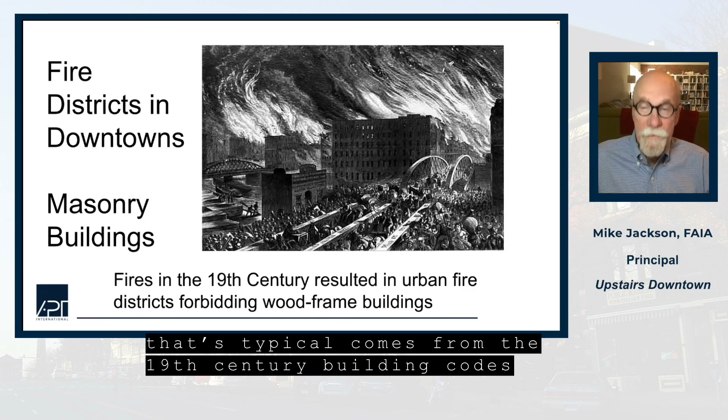It should come as no surprise to you, but basically our whole areas of main streets and downtown commercial centers evolved because of building codes. In the middle of the 19th century, the concern over fires destroying city centers basically caused most communities to early on adopt a fire district in their downtown or central city, which required all buildings to be masonry construction. So our whole basis of Main Street and the look of this character defining feature that's typical to us comes from the 19th century building codes and fire safety.

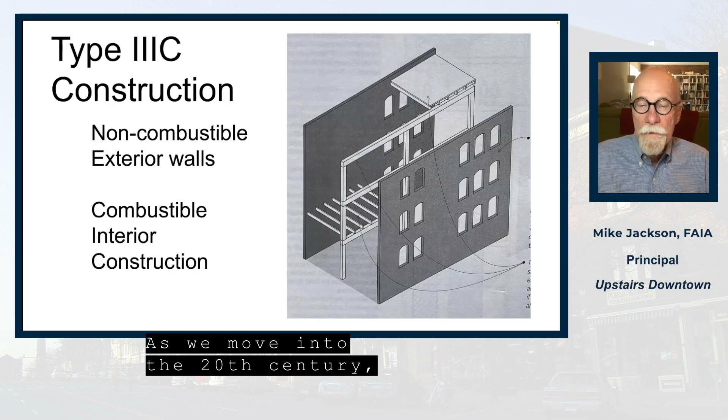Out of this came a modern technical definition of the Type 3C construction, which basically are those brick and stone exterior bearing walls that have a high fire resistance rating, but an interior structure that could be wood framed or combustible. Most of the 19th century buildings are like this. As we move into the 20th century, Main Street evolves into more complicated and more diverse structural systems with steel, iron, and various concrete systems.

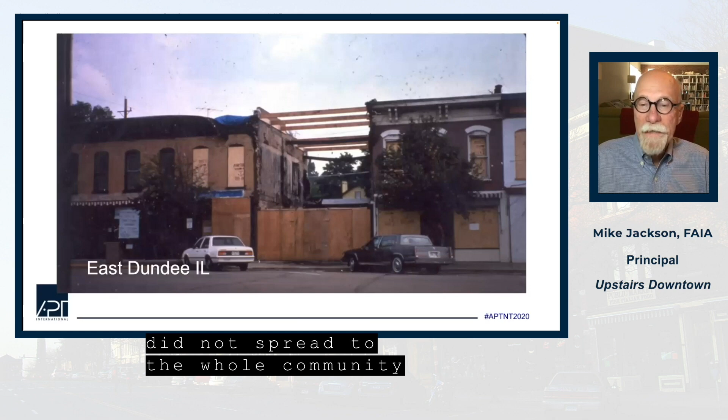So the bread and butter of many of our older main streets is this type of construction. So it's a focus of our effort on codes. And it largely worked with the appropriate fire protection systems. A fire in a single building hopefully did not spread to the whole community because of this idea of these non-combustible masonry bearing walls separating structures.

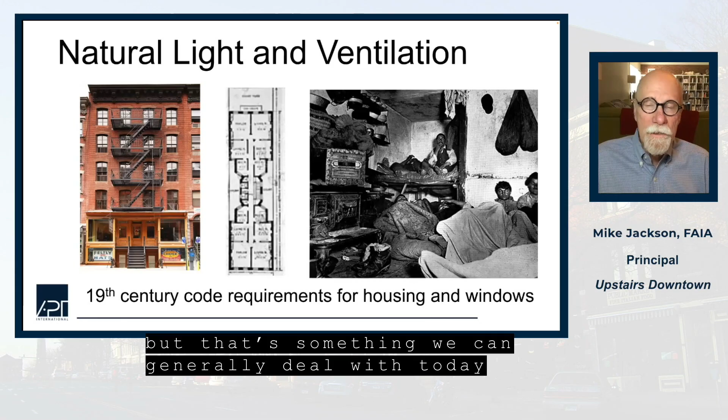But basically, early concerns about natural light drove the idea of how big a building could be. And one of the problems we sometimes have is long, skinny Main Street buildings and light and air, but that's something we can generally deal with today with modern systems.

So what would I say is a typical Main Street building that defines the universe that we're looking at? It's a 2 or 3 story masonry bearing wall structure on a 0 lot line, face to face with masonry party walls. And this has shaped downtowns across the US, beginning in the 19th century particularly, and throughout most of the 20th century. And the platting of Main Street was often done on a lot size of 20 to 25 feet, which becomes one of the modules for the Main Street look of the buildings that we're all concerned about in our program.

In the 20th century, we have changes in structure, but a lot more changes in material. The first floor structure is often just masonry with steel lintels across that. Architectural terracotta comes into play. And then as we move into the mid 20th century and the Art Deco era, we see more playful use of details, but again, more use of non-combustible materials, steel windows, steel structural systems. So Main Streets vary considerably into the 20th century from their 19th century formats, but you still see this street wall of punctured openings, street-oriented architecture.

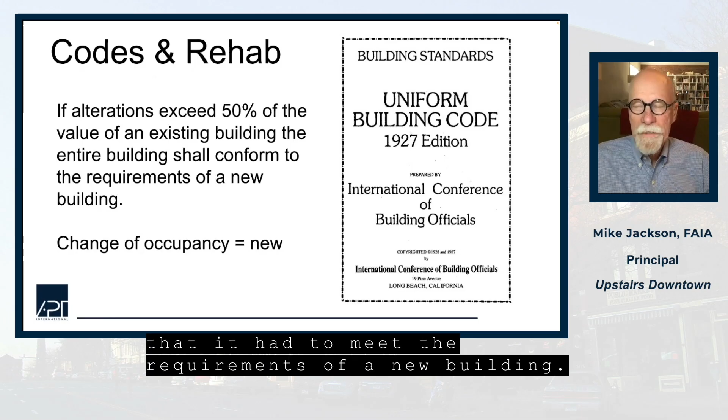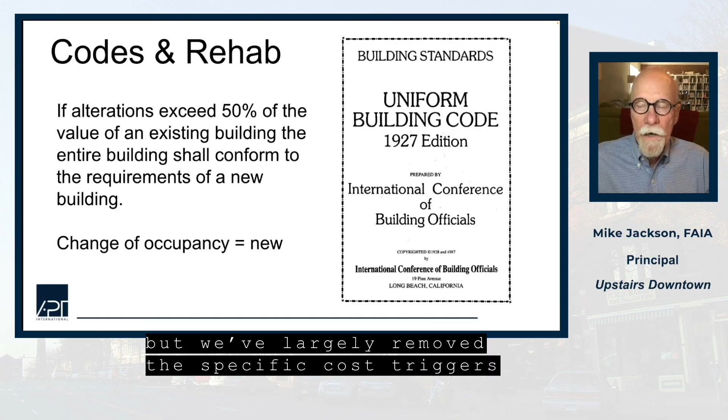This idea of a cost-based formula for older, low-value buildings has become a barrier, because if you are in a smaller community where the downtown buildings are worth a fairly small amount, percentage-wise, and you go to rehab it today, you would easily exceed that 50% and trigger this new construction. This bias towards this idea still exists in the code, but we've largely removed the specific cost triggers from the new codes.

The IEBC, with the work area method, really responded and said we should have a more proportional method of assigning owner-decided things they want to do versus what the code requires based upon the level of work you're doing. So at the repair level, you pretty much are just working with what you've got. There's not a lot of other things that are triggered, but the work area method, in my opinion, when you get to change of occupancy, is really working kind of like the older, earlier codes, where there's an assumption that everything's going to be brought up to some new level, which has historically been a problem with historic and older buildings.

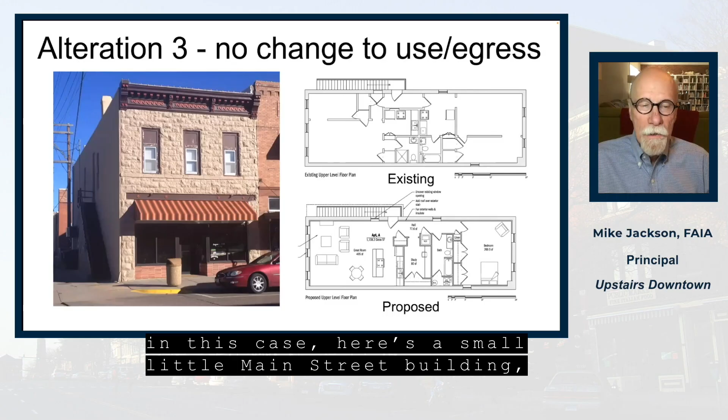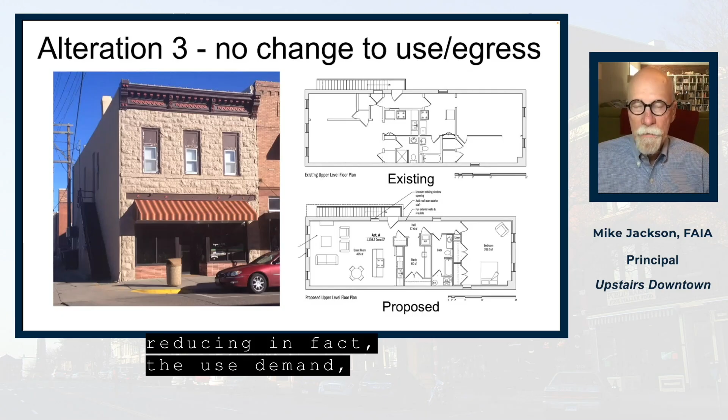Now, there can be extensive renovation of an existing building, but if there's no change of use, in this case, here's a small little Main Street building, one means of egress and a fixed outside metal staircase. Previously, there were two little studio apartments. This was a gut rehab to put one proposed single bedroom unit up there. So no change of use, residential to residential, from a 2-unit to a 1-unit, in fact reducing the use demand.

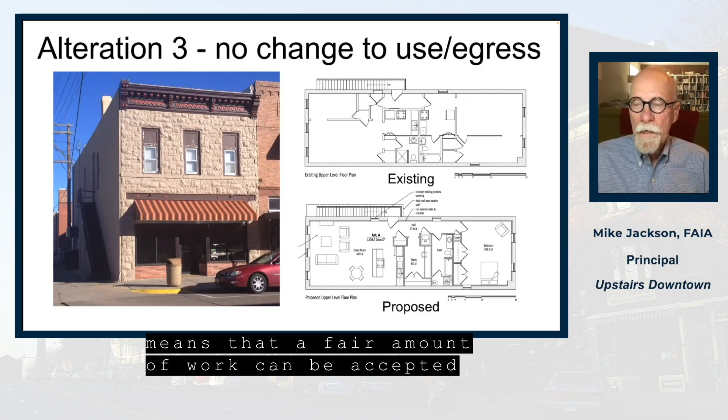And this kind of work could be done without necessarily triggering a licensed design professional, because it's no change of use, no change of egress. It may be a high level of alteration, but the change of use and change of occupancy is the higher trigger than just the amount of work. But again, this varies with local interpretations, but I'm trying to present this as an example. There could be extensive work on the inside of a unit, but no change to the egress path means a fair amount of work can be accepted without necessarily getting a special code interpretation on the change of occupancy.

Now, one of the things that we've discovered in reading the details about historic buildings in the various code compliance methods is this kind of provision. The code says, and this is from the prescriptive method, provisions of the code requiring improvements relative to a building's existing condition, relative to its pre-damage condition, that's referring to fire damaged buildings, etc., shall not be mandatory for historic buildings unless specifically required by this section. So there's interesting language here that says there's some things that are not mandatory for historic buildings.

But then the next section talks about life safety hazards. And then it says the provisions of this code shall apply to historic buildings judged by the code official to constitute a distinct life safety hazard. We're going to dig into this term. In chapter 12, which covers historic buildings, it has a similar clause where basically it refers to distinct fire hazards as defined herein, and says that if you have a distinct fire hazard, you should install an approved fire extinguishing system. And then it allows an exception where the code official can approve alternatives.

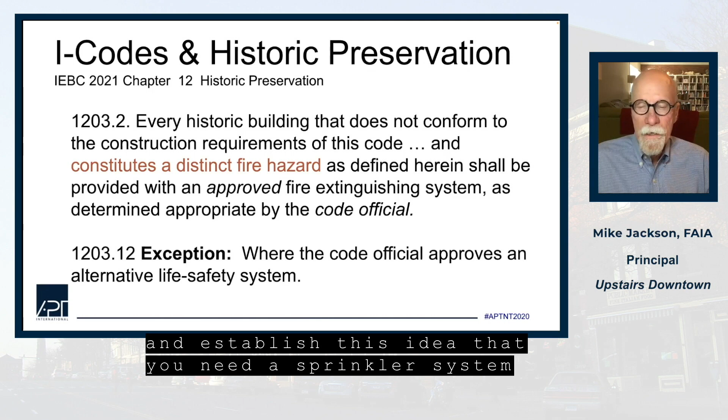This, again, distinct fire hazard versus distinct safety hazard is only in the language affecting historic buildings. So because it's kind of a high trigger and establishes this idea that you need a sprinkler system and a fire extinguishing system, let's look at this term. The code actually doesn't define a distinct fire hazard or distinct safety hazard. We proposed a definition that we took from the California Historical Building Code that says any clear and evident condition that exists as an immediate danger to the safety of occupants of the building or the adjacent public right-of-way.

And the conditions here that are really operational concerns in the fire code are not necessarily a distinct hazard. The fire code might talk about a blocked exit, while removing the blockage from the exit is an operational thing. The fire code might talk about storing combustible paint materials in a stairwell. That would be an operational issue. So operational issues are covered by the fire code. The building code really looks at what is something that's permanent with the structure that needs to be repaired or is missing. I would generally argue that most of the things that I see as distinct hazards are often missing things. So let's look at this one, life safety.

In the code for historic buildings, stairway railings, it says grand staircases shall be acceptable without complying with handrail and guard requirements.

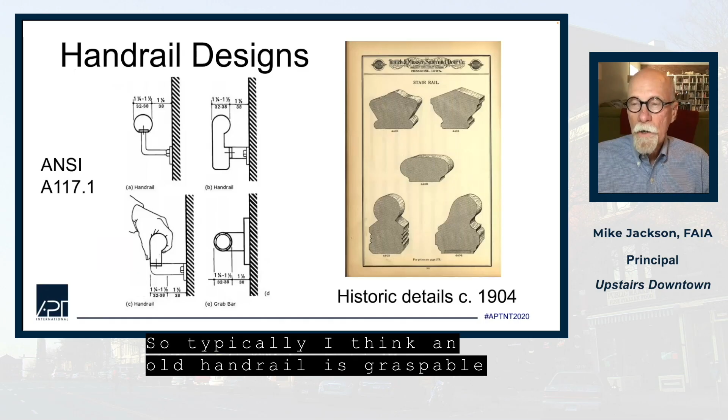And we know that historically, most old staircases had a wider handrail, but they're still made with curves and shapes that make them graspable. So typically, I think an old handrail is graspable and it may not have continuity, but I don't think that rises to the level of a distinct hazard. Only if you had a very large, like 12-inch wide sort of modern or larger stone profile at the top of your railing might it be non-graspable and you would need something. So a couple of ideas on distinct hazard regarding stairs and handrails.

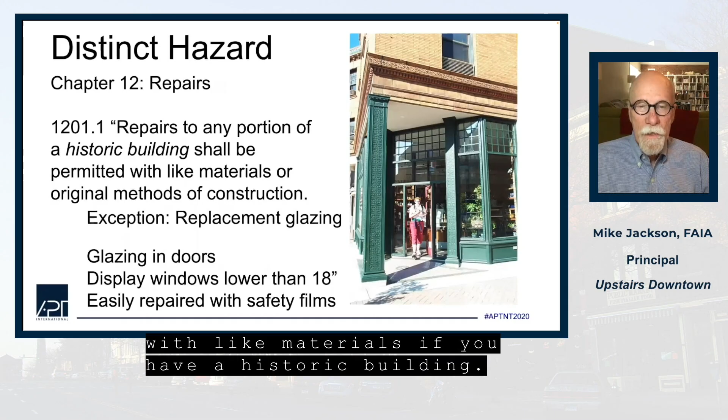The building code allows repairs to be made with like materials if you have an historic building. So if it's historic, like materials are permitted with the exception of hazardous materials such as asbestos and lead paint and glazing. For store owners, I think this is a particular issue. If you have a glass door or you have a display window with a bulkhead that's lower than 18 inches, the code says this is deficient today. I would say this is a safety hazard that's distinct, but the good side of this safety hazard is this is easily repaired with a modern safety film.

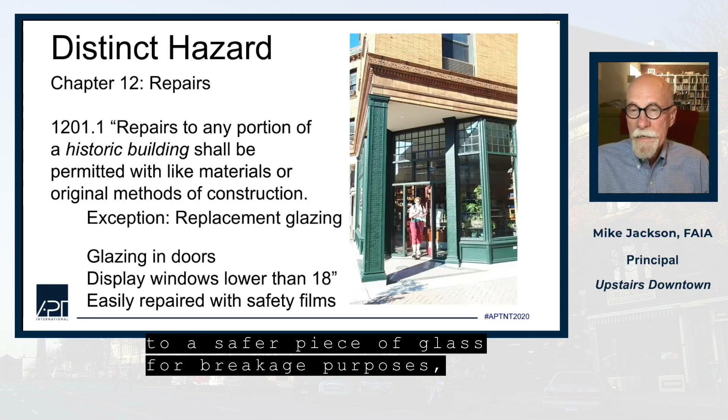So basically you can convert a piece of plate glass to a safer piece of glass for breakage purposes with the addition of the film. And it's a clear film that goes on one side of the glass, doesn't affect your maintenance. And so we can remove a distinct hazard through a modern additive technology. And you don't have to do a sprinkler system to address this distinct hazard. So here's a distinct hazard on Main Street.

On the upper floors of our downtown buildings, we often had corridors with glass transoms. And this was an idea of letting natural light in. Largely not needed anymore because of the artificial lighting that we can do today, which is so much more efficient. If you add a sprinkler system to a downtown building, it says you can leave your transom by putting a sprinkler head on both sides.

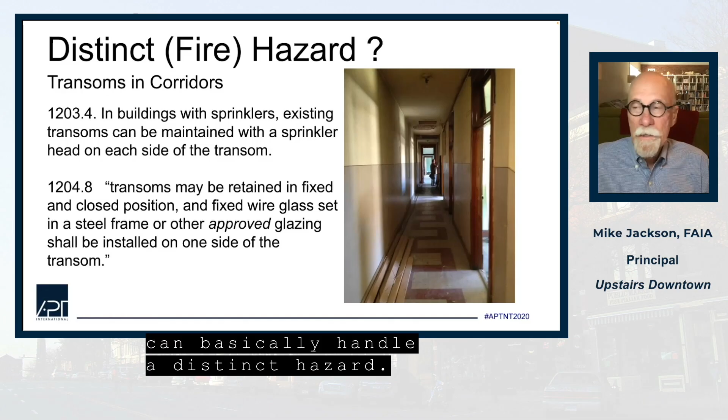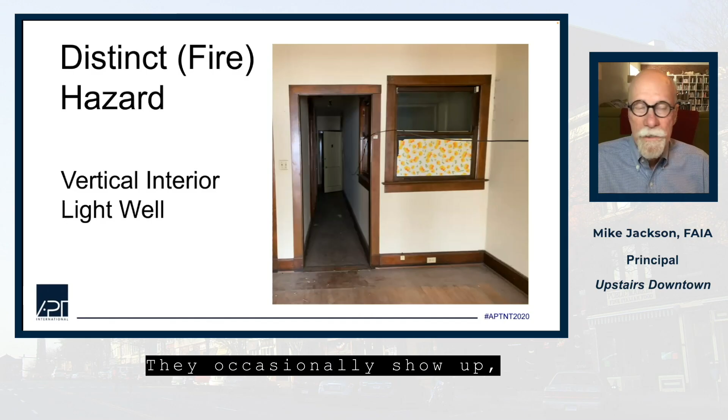So these are not common anymore. They occasionally show up. But these interior light courts would be, to me, an example of something that was a traditional material or design feature in an older building that could be considered to be a distinct life safety or fire hazard.

More often, the challenge that comes up that we see on codes that I want to kind of dig into, and you're going to hear more about in our workshop, is the change of occupancy, particularly putting more housing. If you put housing upstairs in a vacant space, prior use comes into consideration, but this creates issues of egress, fire separation, what level of fire protection besides fire separation, the sprinkler or not, and then cost, design, and issues related to that.

First issue for you is the number of exits you need. Basically you start with the IEBC and you end in tables in the building code. Only small-scale 2-story buildings are allowed to have a single egress from the second floor for residential occupancy, and in this case, a maximum of 4 units, with a travel distance of 125 feet. So this puts us in that small-scale building that I showed an example of earlier. So only the smallest buildings.

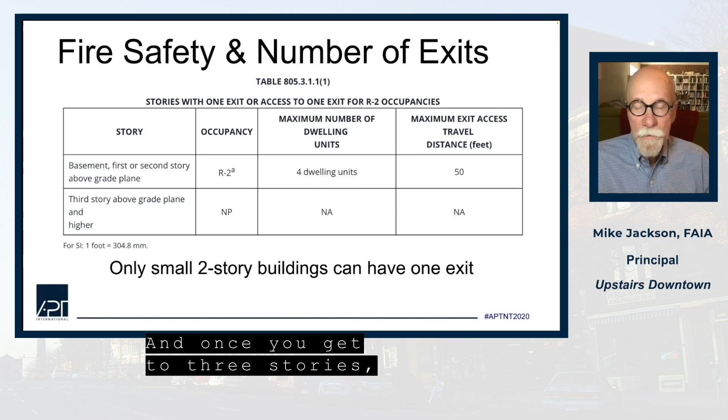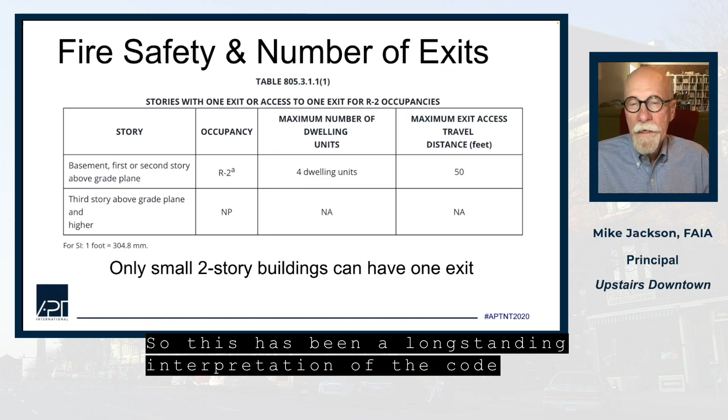And once you get to 3 stories, you're into requirements for 2 exits. And that can be front and back or side by side, depending upon how large your building is. So this has been a long-standing interpretation of the code. And further, here's that example of that small-scale building I mentioned on Main Street.

The IEBC specifically has this exception: for buildings less than 3,000 square feet total, existing conditions are permitted to remain at all stairways and guards. So this basically grandfathers in the existing stairs, railings, and guards on all small-scale buildings on Main Street. But I would still point out there could be some need for better gripping on handrails and guardrails, depending upon these dimensional exceptions I've talked about.

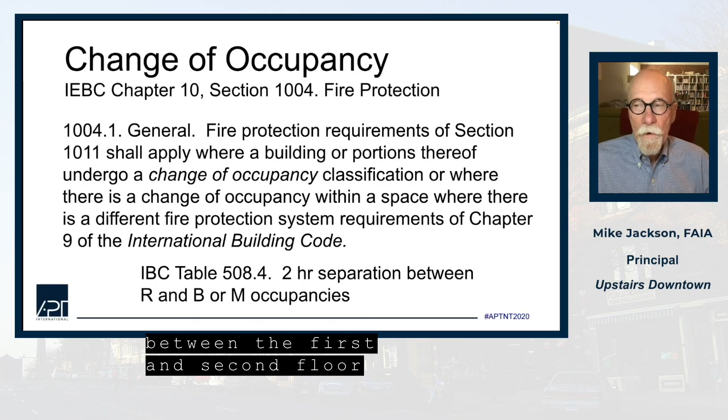The code is very clear about the issue of fire protection and separation. This is the topic related to enclosures and safety from having barriers and fire-rated systems. Fire protection is required by Chapter 10 of the IEBC. And if you look at all the references, it ultimately gets you to a chapter in the International Building Code, which says you need a 2-hour separation between an R use on the second floor and a business or mercantile use on the first floor. So this 2-hour fire separation becomes a very real design issue in terms of rehab.

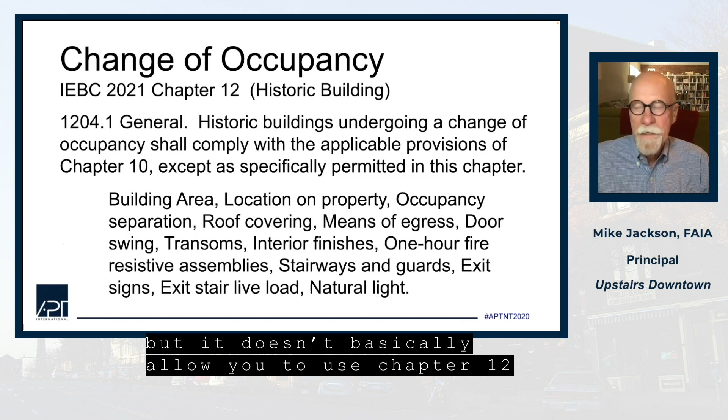Chapter 12 on historic buildings has its own little section on change of occupancy, but it pretty much gets you back to the other code provisions. It doesn't give you many details, and we're going to have more details in this conference on change of occupancy in IEBC Chapter 12, but it basically doesn't allow you to use Chapter 12 to eliminate the 2-hour rating requirement.

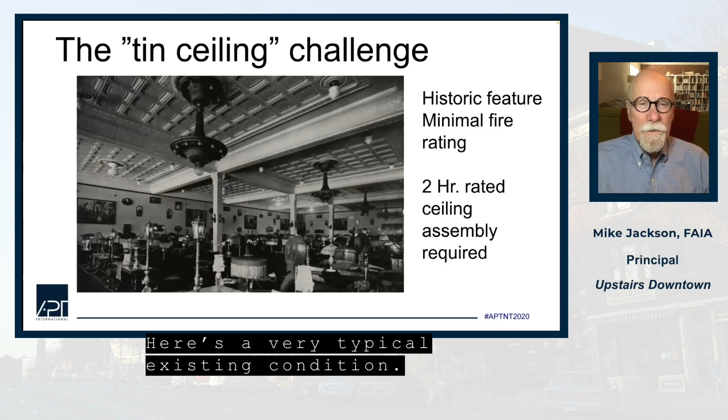Why is this such an issue? We know that there are lots of downtown and older Main Street buildings that had a tin ceiling on the first floor. A tin ceiling is a wonderful historic character-defining feature that actually has a fairly minimal fire protection rating. So if you converted a building and needed to get a 2-hour rating, what are you going to do? Here's a very typical existing condition. How do we get to 2 hours?

Well, if you put a sprinkler system in, you generally have met that requirement, and you're not going to have to change that separation rating. And I want to make a very important point here in terms of meeting the design standards for preservation. It's largely been accepted that exposed sprinkler piping on the first floors of our commercial buildings, even with an exposed tin ceiling like this, generally is not considered to threaten, destroy, or alter the historic character.

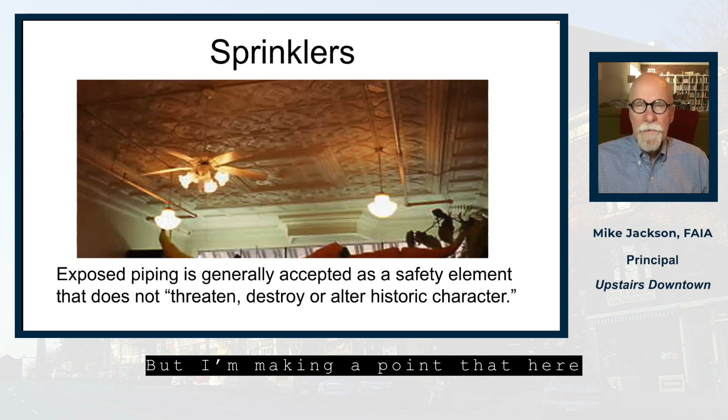The sprinkler piping has minimal dimensions, and it could be on the ceiling held away like this, or on the side walls, depending upon your dimensions. My point is that the sprinklers in and of themselves are probably not going to damage the historic character. So it's better to work with them exposed rather than trying to rip everything out and bury them. If you're furring out walls, you might be able to bury them, but in this case, we generally accept having them exposed as an appropriate historic preservation treatment. But that can be expensive compared to other options.

And I've got 3 different scenarios here of what you could do. Removing and reinstalling a tin ceiling with a new drywall is technically doable, and it is virtually impossible to do it really well. The old tin ceilings do not remove nicely and stay straight and crisp. They bend, they buckle. So this is an extremely high level of difficulty.

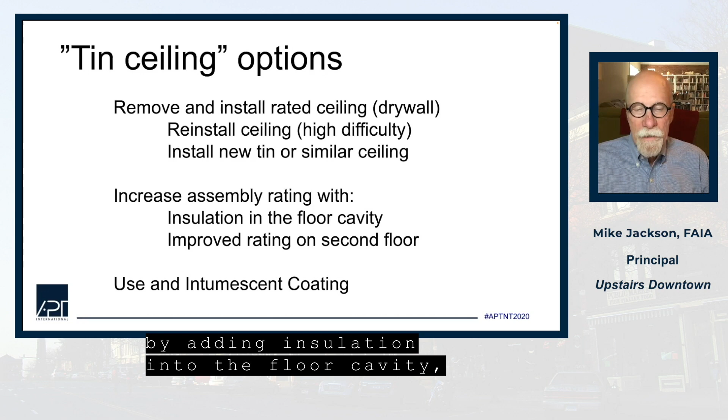It would conceivably be possible to remove a ceiling and put a new ceiling that would be similar in design, that would be less expensive than removing the existing one, but then you've lost the original material as well. You can also, though, increase the fire rating of the assembly by adding insulation into the floor cavity, or even improving the rating of the second floor. But again, depending upon how much you're putting on the second floor, that could change your doors and door thresholds and other issues on the second floor.

So it has issues. And lastly, you're going to hear in our program a session on the use of intumescent coatings, which is a new kind of technology that goes on like paint and can definitely increase the fire performance rating, because this intumescent paint swells up in a fire and improves the fire rating of tin ceilings and other materials. So these are 3 examples of preservation-based approaches that can basically address the 2-hour rating.

And then there's always the issue of what if you go through this and you get an hour and 45-minute rating instead of a 2-hour rating. There's where the authority having jurisdiction can say, listen, if you got that close, we'll accept that given other conditions. And we're also going to dig into the code options on that as well.

Now, lastly, I want to move from the discussion about what's in the existing code that are some of the major issues for us to what you can do about it. And what we discovered is that states and cities across the US are amending the code. Only a few states maintain a specific state historic building code. California has the state historical building code, and Ohio uses its own code as well that basically works with the older performance measures from the BOCA building code from the 1980s. So Ohio is also kind of working on its own on this and has been very successful with their historic buildings.

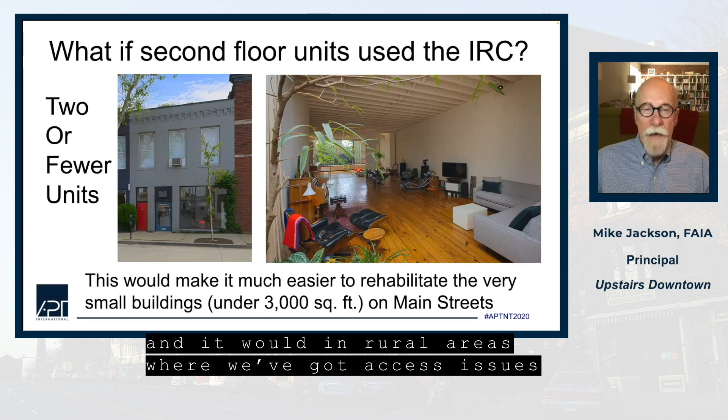But I'd like to propose another challenge. What if 2 or fewer units on the second floor could be done for buildings under 3,000 square feet using the International Residential Code? This would be a simpler version of this, and in rural areas where we've got access issues to architects and design professionals, this may be an easier way to allow the conversion.

Now, this example I'm showing here was done in 1960, and it was done by an architect. It's an early loft conversion, but this idea that maybe there is a place for amending the code to allow the IRC to be used on the second floor of 2-story small-scale buildings may be a way, from an affordability standpoint and reducing the barrier of access to professionals, to encourage the rehabilitation of upper floors. This is an idea I think is going to be worth exploring as we look at amending the code in the future.

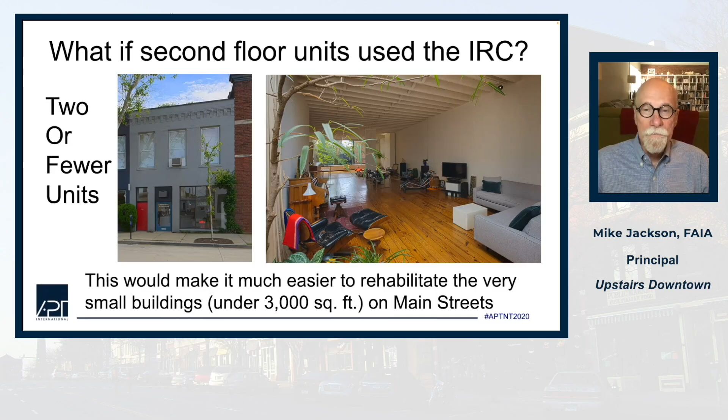Now, another long-held issue within the building code world has been that of single exit buildings. There's been some work on this in Pittsburgh and New York City, which has a lot of smaller scale 5-story buildings. But Charlottesville, Virginia recently changed their building code to allow new 5-story buildings with full sprinkler systems to be built with a single exit system.

And this is related to a lot of construction details for the fire protection of the single exit and the format. Research on this has come out of the West Coast, out of Seattle, and out of Europe, because many European centers like Paris have single exit buildings, and they use other fire protection systems that have worked quite well. So this challenge to the idea of a single exit staircase when you sprinkler would help offset. If we have a higher threshold of cost to add a sprinkler, maybe one of the benefits of that is reduced exit requirements.

Now, the current code says this about single exit buildings with sprinklers: an automatic fire extinguishing system or sprinkler shall not be used to substitute for or act as an alternative to the required number of exits. So basically, when you sprinkler a building, we now give you longer travel distances, but we don't allow you to reduce your number of exits.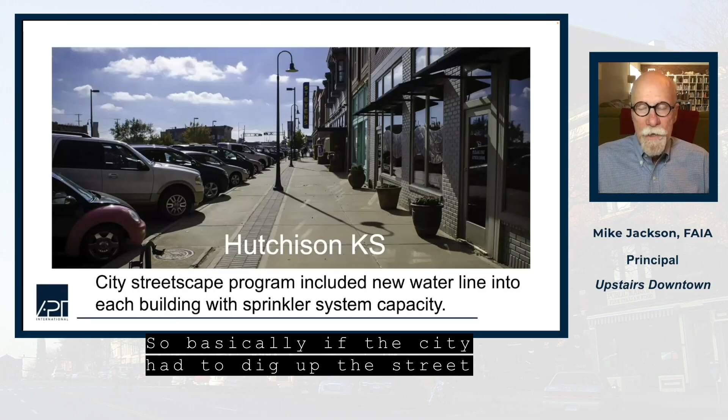Moving to the topic of incentives, Hutchinson, Kansas recently replaced their sidewalks. And when they did so, they put a sprinkler-capacity water line into every building on Main Street. So basically, if the city had to dig up the street, they used that as an opportunity to upgrade the water lines. A very thoughtful way to use public funding expenditures to assist fire safety. Great Bend, Kansas, just a short distance away, now has a fire safety grant program for their downtown.

And basically, it's under a downtown loft housing grant. They have a formula of up to $5.50 per square foot for the installation of sprinklers or other life safety fire alarm systems. And you have a minimum expenditure. Your building owner is going to be spending at least $50,000, and what they're looking at is people putting upper floors in their downtown back into use and using, in effect, the cost of the sprinkler to be the incentive to encourage people to invest in life safety improvements.

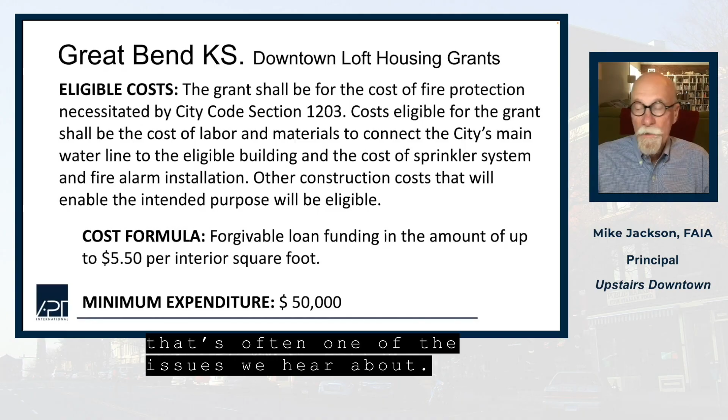So these are ways cities can work creatively to help, again, put more housing downtown and overcome kind of the sprinkler cost barrier that's often one of the issues we hear about.

Now, if you're not an APT member, we want you to join because our APT Codes website is a resource link for you. We are gathering the data on historic building codes, regional and state building codes and amendments, legacy codes, and then our new changes that we propose to the IEBC. So the APT Codes and Standards Technical Committee is taking a lot of initiative on this topic.

Our APT Building Technology Heritage Library is a place to find archival building codes, and we will be expanding this next year, working all the way up to 1963 to get all the building codes and the prior issues of the building codes in America on a free open access to everyone. So we see part of our mission as giving you the tools of knowing what the historic building code said, so you can understand what you're starting with.

Another part of our program is that APT will be posting the case studies from this and other examples on our website. We have separate funding from the National Center for Preservation Technology and Training to publish our case studies.

I want to thank you on behalf of APT and our Main Street Design Committee for participating in this workshop. We hope you learn a lot about the buildings of Main Street and the ways in which building codes can make our buildings safer and keep them active and used into the next generations. Thank you again.

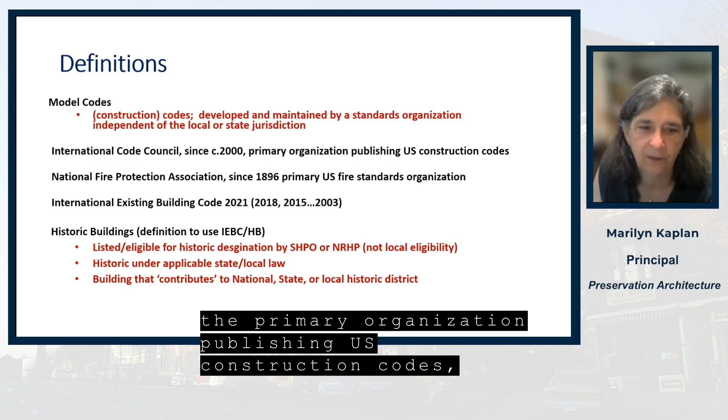First, a few definitions of the terms I'll be using, and I'm sure we'll hear many times over the next few days. The model codes are construction codes in this context. They're developed and maintained by a standards organization independent of local or state jurisdiction. They are models until they're adopted. The International Code Council, since just before 2000, the primary organization publishing U.S. construction codes. The National Fire Protection Association, since 1896, the primary U.S. fire standards organization. The International Existing Building Code, the current version is 2021 and goes back to 2003.

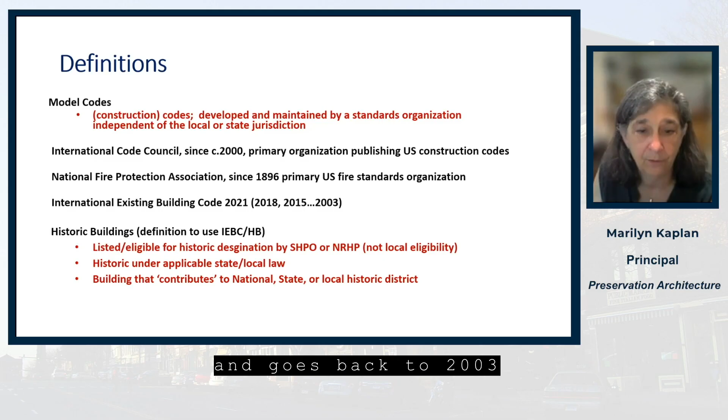And historic buildings, as defined in the existing building code, are those that are listed on or eligible for historic designation by the State Historic Preservation Office or the National Register, not locally eligible. They're historic under applicable state or local law, or they're buildings that contribute to national or state or local historic districts.

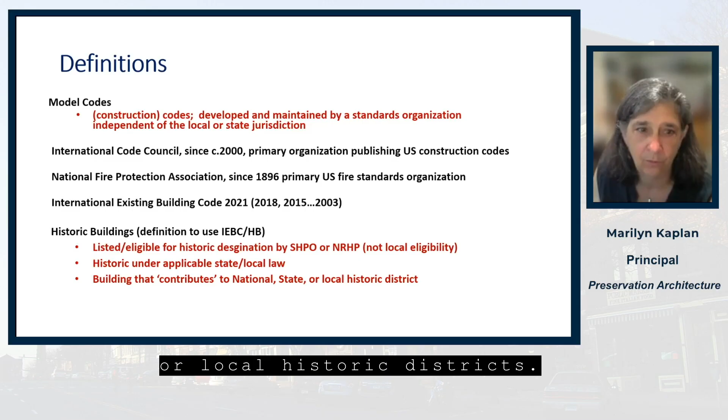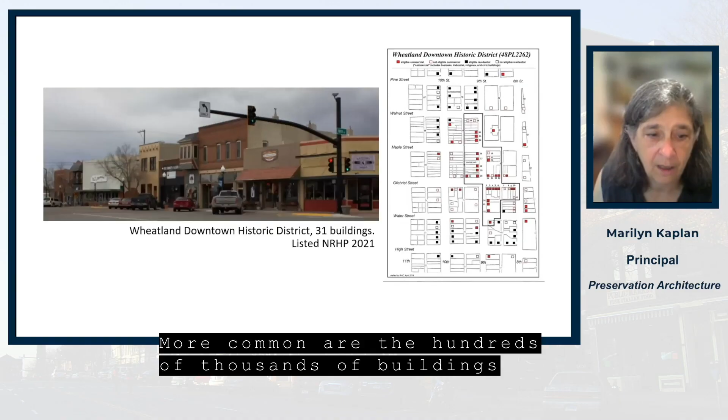It's been 169 years since the Mount Vernon Ladies Association was formed to protect Mount Vernon, George Washington's home. And it's been more than 90 years since the first historic district was created in Charleston, South Carolina. There's a tremendous boost to the field of historic preservation with the bicentennial.

The National Historic Preservation Act was passed, it became model legislation followed by many states, the creation of the National Register of Historic Places, the publication of the Secretary of the Interior Standards for Rehabilitation, and the very successful Federal Historic Tax Credit Program. In the 2021 annual report published by the National Park Service, over 45 years, the program can show tremendous accomplishments, including providing hundreds of thousands of housing units.

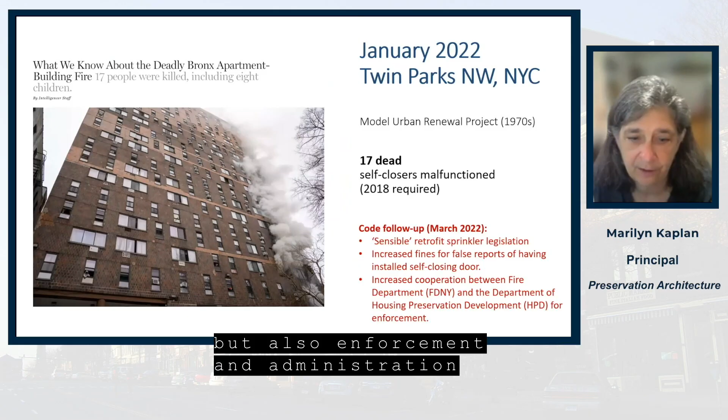For example, significant code changes were made after Hurricane Andrew in South Florida in 1992. And more recently, efforts to expand not only technical requirements, but also enforcement and administration followed the terrible fire, the Twin Parks fire in the Bronx earlier this year. And just last year, the Dixie Fire took more than 1,000 buildings, people's homes, and of course, the forests.

We, in our practices and our work and in the codes, are now much more involved in discussions related to the impact of regional climate change, as well as the most global of issues, the impact of carbon. But today we're talking about Main Street, how to better protect and use these buildings, which are critical opportunities to address housing and to strengthen communities.

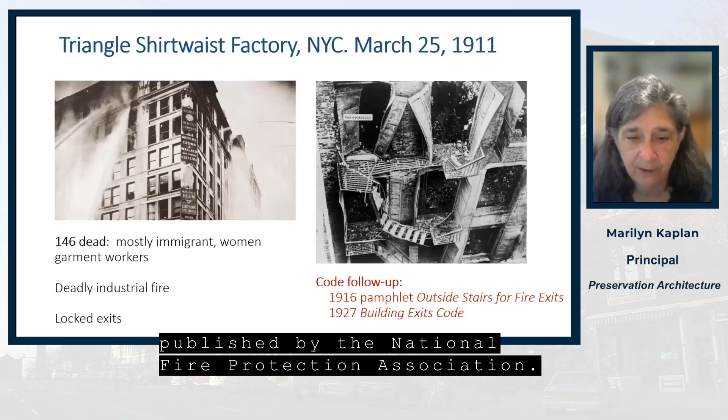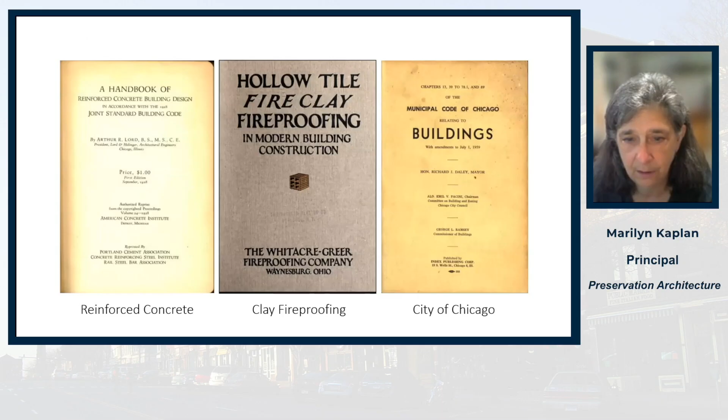Before 1997, the US had evolved to have 3 model code organizations, each of which published their own document that addressed that region's priorities. The oldest was the Uniform Building Code of the International Conference of Building Officials. We loosely said that that was the code west of the Mississippi. In the Northeast, where I am, we had BOCA's Basic Building Code, and in the Southeast, we had the Southern Building Code Congress's Southern Standard Building Code. We also had the NFPA, who you've already heard of, founded in 1896.

And an organization formed by the three model code organizations, the Council of American Building Officials, one of the first to publish energy codes for residential properties. In the late 1990s, the International Code Council, the ICC, was formed by the model code organizations, which by now have largely disappeared, as have their codes. The ICC's first code was the International Plumbing Code, published in 1997.

This is the current family of codes published by the ICC. Not all are adopted by every jurisdiction, and many jurisdictions have different editions of codes that are adopted. Of these, the typical ones that we deal with for existing buildings are the building code, the residential code, fire code, existing building code, mechanical and plumbing, energy conservation for sure.

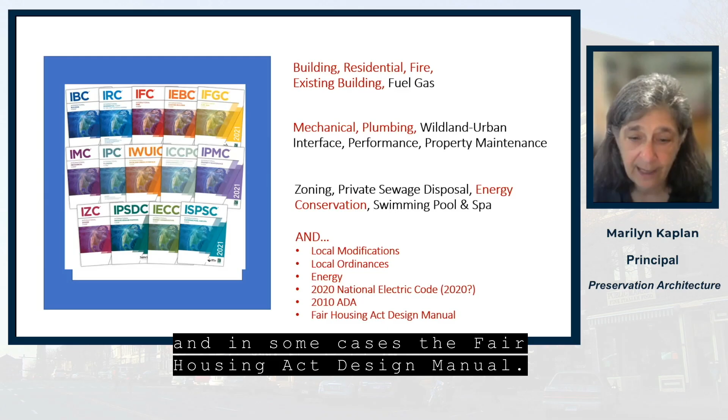And we need to be aware of any local modifications, local ordinances, any local energy requirements, as well as the references to the National Electric Code, the 2010 Americans with Disabilities Act, and the guidelines, and in some cases, the Fair Housing Act Design Manual. This is not simple stuff. And finally, there are, of course, other requirements, such as those addressing worker safety, lead, and asbestos, which are generally beyond the scope of what we're talking about today.

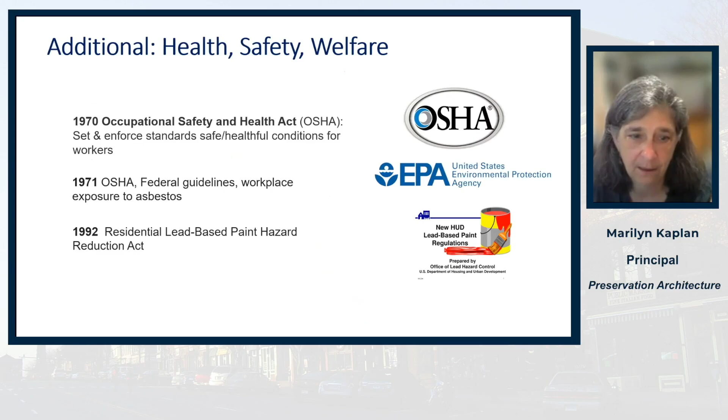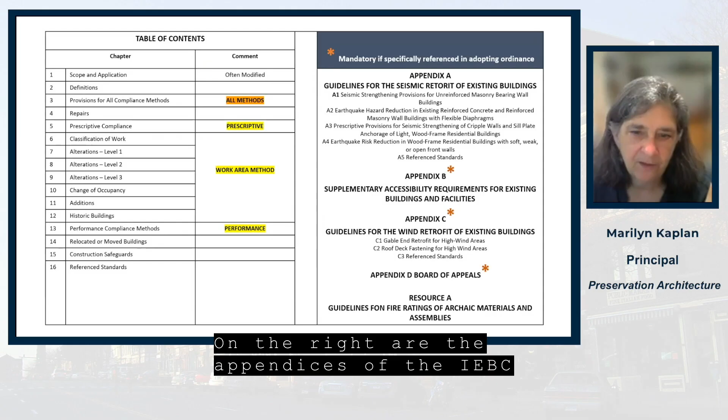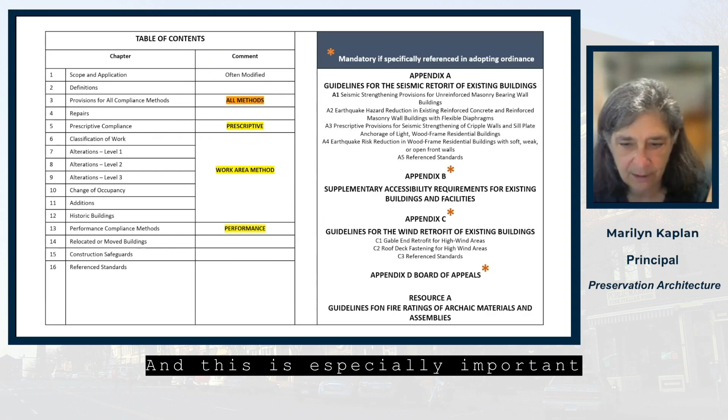On the right are the appendices of the IEBC, and the takeaway is that those with the orange asterisks, Appendix B, Appendix C, and Appendix D, are only part of the code if they have been specifically adopted. And this is especially important back with the residential code, as the only rehabilitation provisions there are in Appendix J.

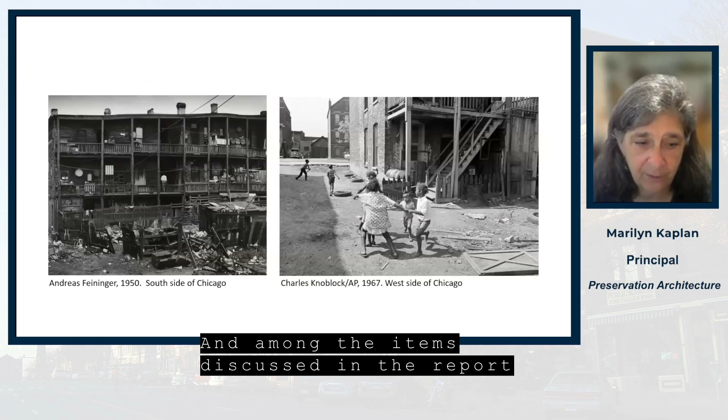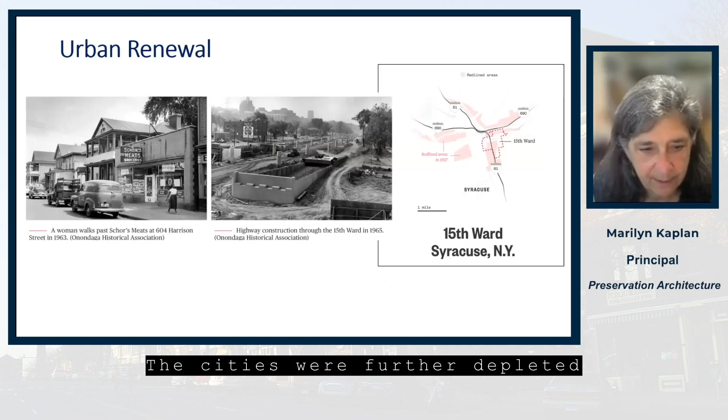So where did this first edition come from? How the IEBC came to be is really quite an interesting story. The 1968 Presidential Commission, appointed by President Johnson, issued this report on civil disorders. And among the items discussed in the report was the abandonment of the cities and the destabilization of the cities. The cities were further depleted by the impacts of urban renewal, the federal highway program that helped build the suburbs, and all tied back to the 1930s redlining maps that had been prepared by the federal government.

In his message to Congress in 1965, President Johnson had called for the creation of a commission to study building codes, housing codes, to use these to deal with slums, urban growth, sprawl, blight, and to ensure decent and durable housing. And at that time, we were just beginning to figure out that some of the government's previous approaches to providing housing that had been developed in the 1950s were not successful. Many of you are familiar with the demolition of the Pruitt-Igoe apartments in St. Louis.

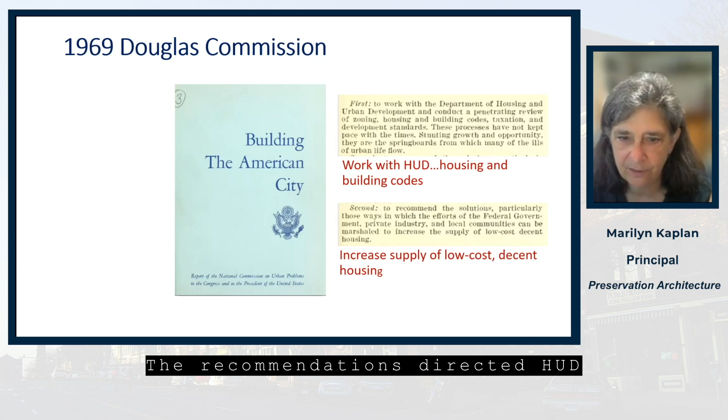Another commission, also focused on urban problems, recommended a direction that focused on HUD, housing, and building codes. The recommendations directed HUD to be engaged in housing and building codes, and that this would be among the methods to increase the supply of low-cost, decent housing.

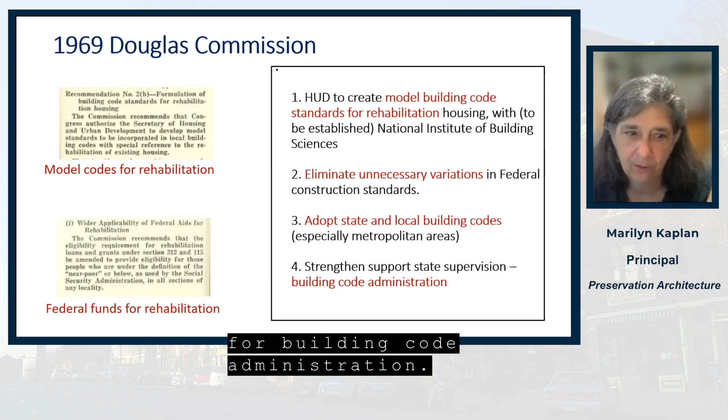In principle, the IEBC measures out how unsafe a building is against the risk presented by the occupants and what the owner intended to include in their project. For example, third floor, single exit, unsprinklered wood frame building with a daycare center on the third floor, maybe a restaurant on the first floor, too great a risk.

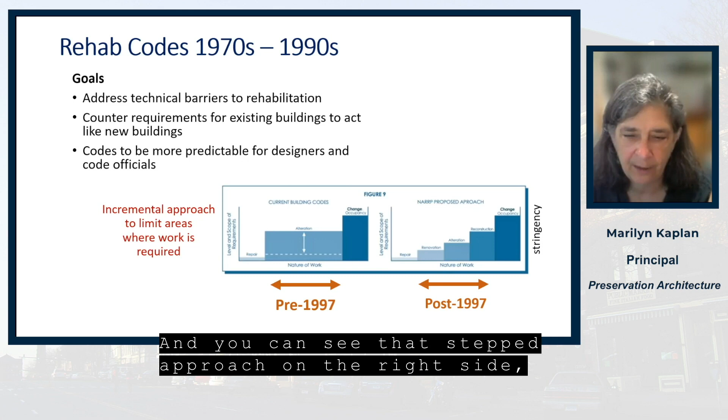Those rehabilitation codes of that period integrated new approaches, a scoring system, meaning quantitative system for determining fire safety, dealing with hazard ratings for changes of occupancy, and a work area method for alterations and changes of occupancy. In fact, that scoring/quantitative system became what is in our codes now called the performance compliance method. The hazard ratings is in our current work area method. And in addition, we have prescriptive compliance.

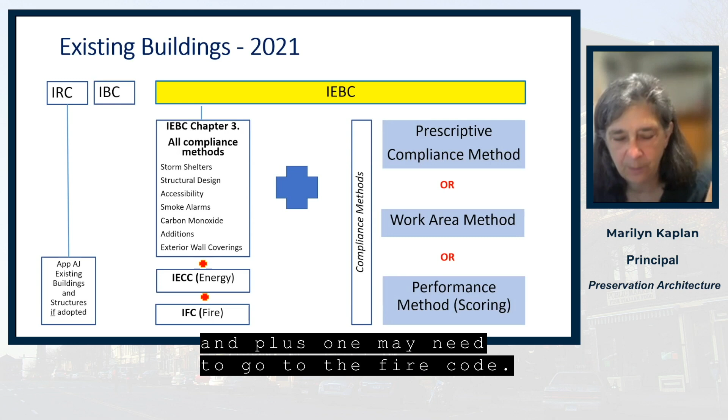Here's the existing structure of the IEBC. Again, there's the residential code, which may be available to a project, the building code, which may be available to the project, and the existing building code. You can see on the left, IEBC, Chapter 3, those are the items that apply to all compliance methods, plus one needs to go to the energy code, and plus one may need to go to the fire code. So it's Chapter 3 plus a choice of one of 3 compliance methods, prescriptive compliance, or work area method, or performance method, meaning scoring.

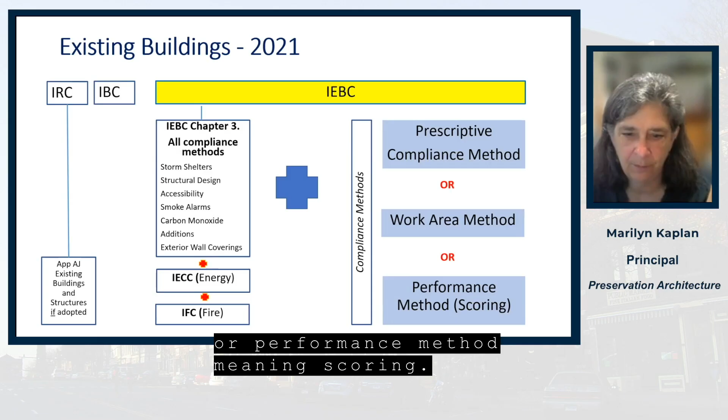For historic buildings, the prescriptive compliance method is really most similar to the building code. It's the most traditional approach, and many are comfortable with that. The language for historic buildings requires judgment on the part of the code official. Historic buildings, relative to the existing condition, the requirement's not mandatory, except judged by the code official to constitute a distinct life safety hazard. And you heard earlier from Mike some of the complications of what that might mean. And there are additional requirements for flood hazard areas.

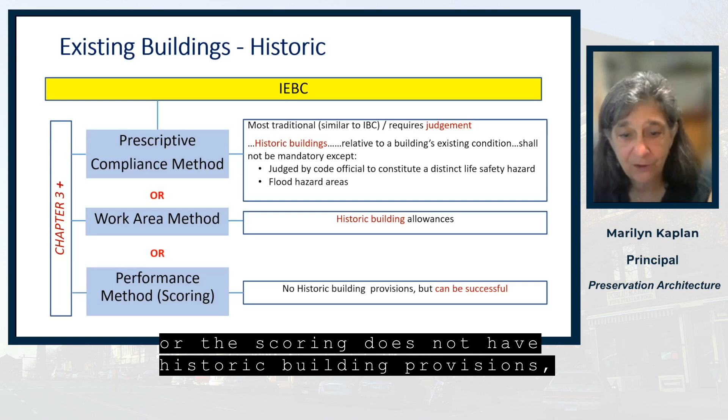The work area method, as I'll show you shortly, does have some historic building allowances. And the performance method, or the scoring, does not have historic building provisions, but it can be very, very successful, in particular to smaller Main Street or historic structures.

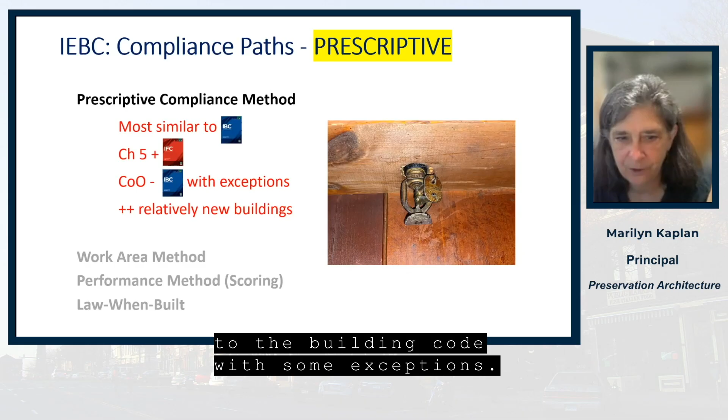The prescriptive compliance path, again, most similar to the building code, Chapter 5 of the IEBC, plus some requirements of the fire code. Change of occupancy kicks us back to the building code with some exceptions. It can work well for some relatively new buildings. Often fire suppression is required, which can be a problem for Main Street structures and other historic structures.

The work area method, you've seen before an illustration of the incremental approach. It can be the most flexible. The provisions of the work area method are triggered by scale and the level of work. It attempts to limit the areas of required work, called the work area. Change of occupancies are based on the degree of hazard change, and there is an historic building overlay to the other requirements for existing buildings.

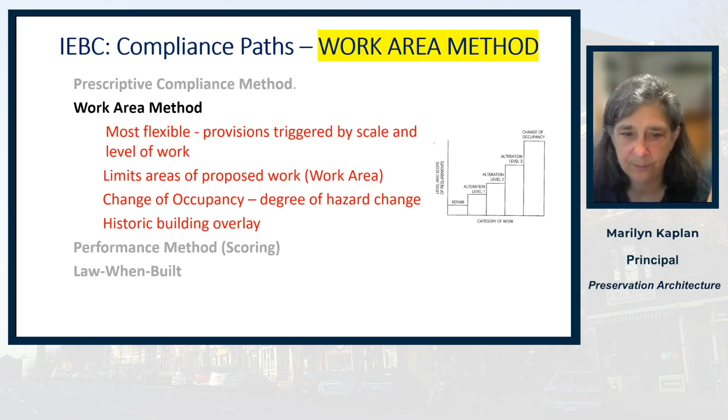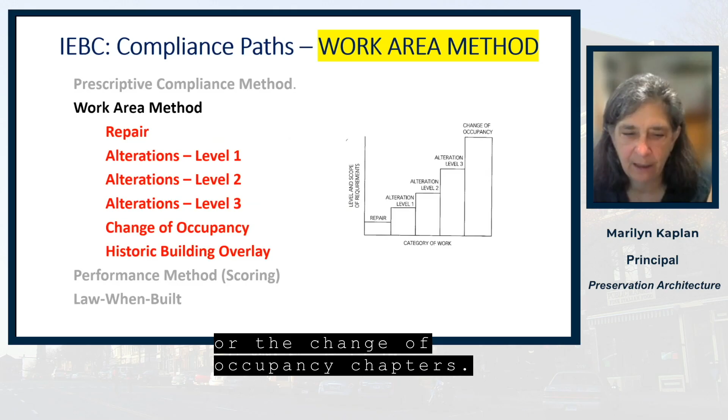Work area method: repair, alterations level 1, level 2, level 3, separate chapter for change of occupancy, and then the historic building overlay, whose requirements, again, overlay those in the alterations or the change of occupancy chapters. Repair is the lowest level of work. In general, it's the reconstruction, replacement, renewal of any part of an existing building for maintenance or to correct damage. Generally, it can be done in kind, with few exceptions.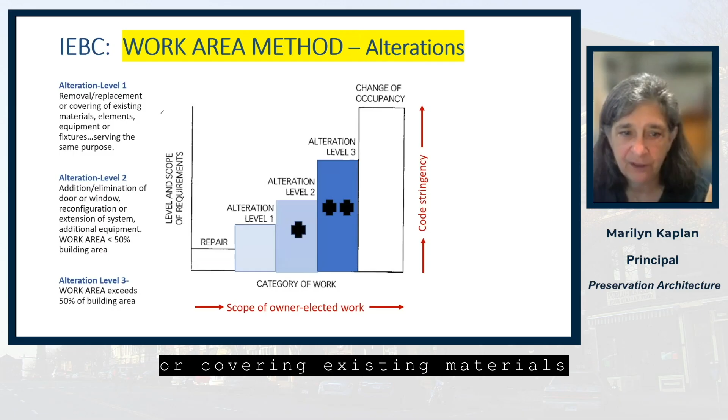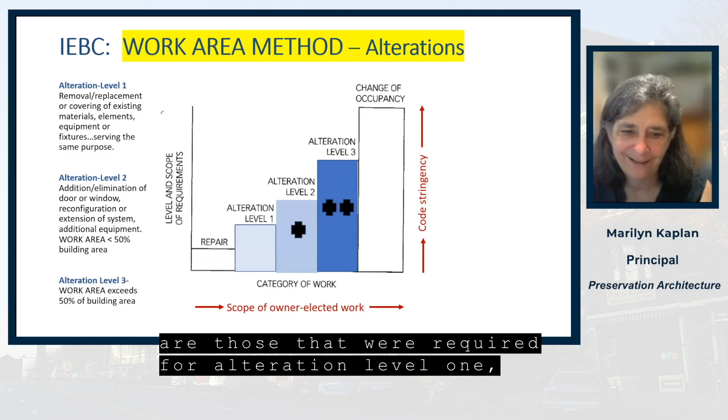Alteration level 1 is removal, replacement, or covering existing materials or elements serving the same purpose. Alteration level 2 is when a door or window is added, space is reconfigured, a system is extended, work area is less than 50% of the building area. The requirements for alteration level 2 are those that were required for alteration level 1, plus additional requirements in the alteration level 2 chapter. And similarly, alteration level 3, where the work area exceeds 50% of the building area, picks up those requirements from alteration level 1 and from alteration level 2 chapters and brings additional requirements.

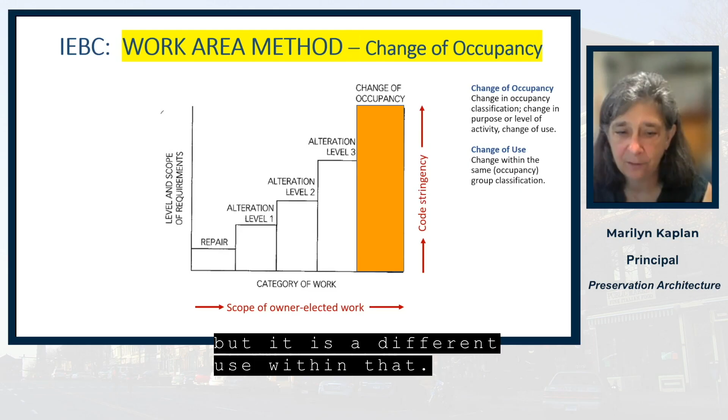Change of occupancy, the last classification of work. A change of occupancy would be still the highest set of requirements for the existing building. We call that the change of occupancy penalty, but a change of occupancy is a change in the occupancy classification, which is how the code organizes different occupancies by risk, or a change in the purpose or level of activity, or a change of use. And the change of use, because these terms are often used interchangeably, is when you're in the same occupancy group classification of the code, but it is a different use within that. So it might be a more intense residential use, for example.

In that work area method, how a change of occupancy is dealt with is there are 3 different tables used to determine, when you compare the pre-rehab and the proposed rehab occupancies, if the relative hazard is an increase or decrease. This comes from the state of Massachusetts, some early work. The code requirements follow this movement on the scales for means of egress, heights and areas, and exposure of exterior walls. And there'll be a whole separate session on this.

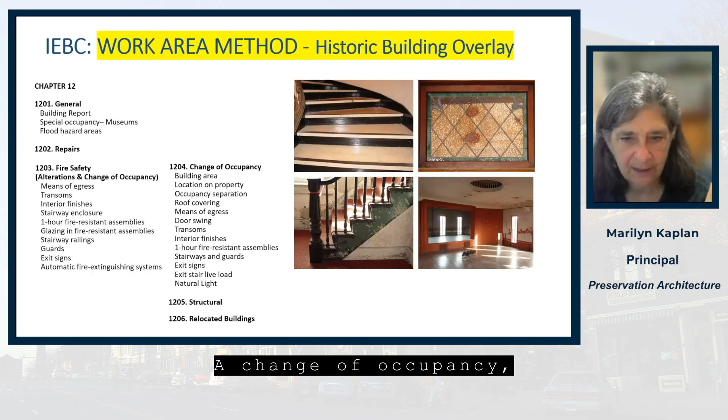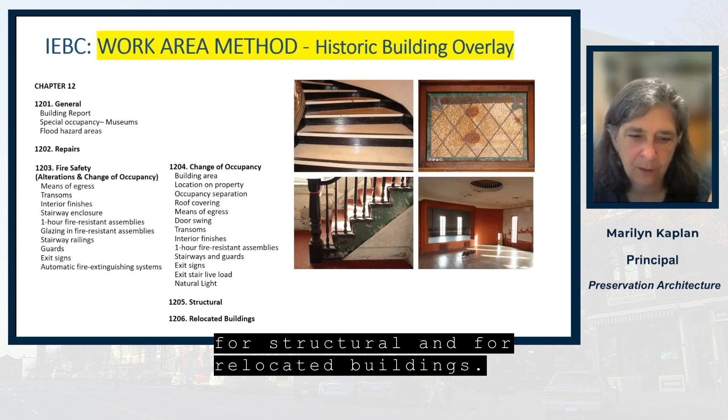Chapter 12 for historic buildings is organized as I've shown here. There's general requirements, which may include that a building report be done, special occupancy for certain museums, requirements for flood areas. Then we have repairs, 1203, fire safety, which really applies to alterations and change of occupancy. And you can see that there will be some special provisions for means of egress, transoms, interior finishes, stairway enclosures, etc. A change of occupancy, again, considered to have a greater risk, brings additional requirements to that project type. And then in addition, there are special requirements in this historic building chapter for structural and for relocated buildings.

There's a lot of text describing what a building code report is, but essentially what it says is you're going to investigate and evaluate the building. The design professional will file a report if the code official determines that's necessary. The report will identify each required feature in compliance, each feature that is not in compliance, and there are some special provisions for seismic design categories D, E, or F. And we'll speak again to how to use the building report as a design tool and as a documentation tool.

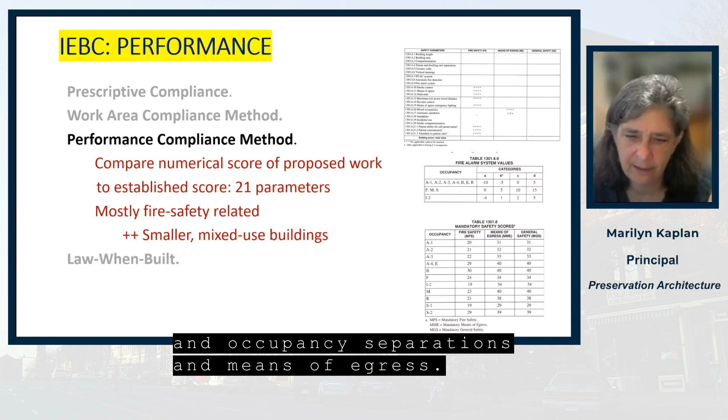That last compliance method, performance path, is performance compliance. It's called compliance alternatives in some codes. It's had different names, but again, it is the scoring system that this workshop will focus on. Essentially, we are going to compare the numerical scores of proposed works in 21 primarily fire safety parameters to the established score of a proposed project. And if it exceeds a given number, you have a safe building. If it does not exceed it, then you've got different options to go back and increase the score that you receive for these parameters. These are mostly safety related, and the performance method seems to work very, very well with smaller mixed use buildings, in particular fire suppression and occupancy separations and means of egress.

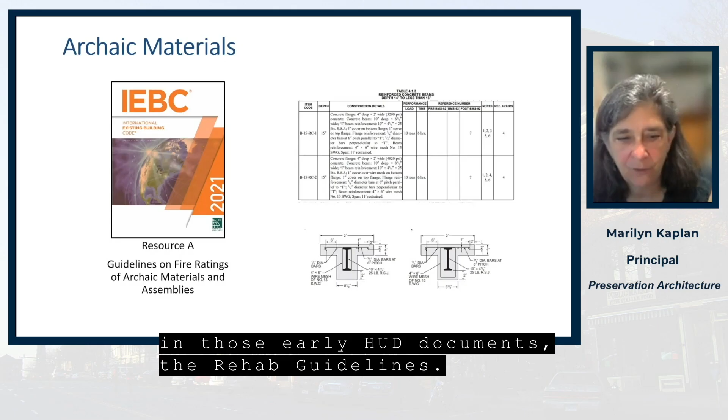The IEBC includes something produced in those early HUD documents, the rehab guidelines. Resource A is the guidelines on fire ratings of archaic materials and assemblies. Very, very useful because these are not building systems or assemblies otherwise with ready access to what the fire resistance ratings of those are. So a very important resource included in the appendix materials.

So if this is so great, what are some of the barriers that we have? Well, when we talk about all of the compliance methods, the IEBC is a difficult code to use. It can be improved. It's essentially, at its heart, 25 years old and lacks comprehensive updates. It has not incorporated some of the common solutions and emerging technologies.

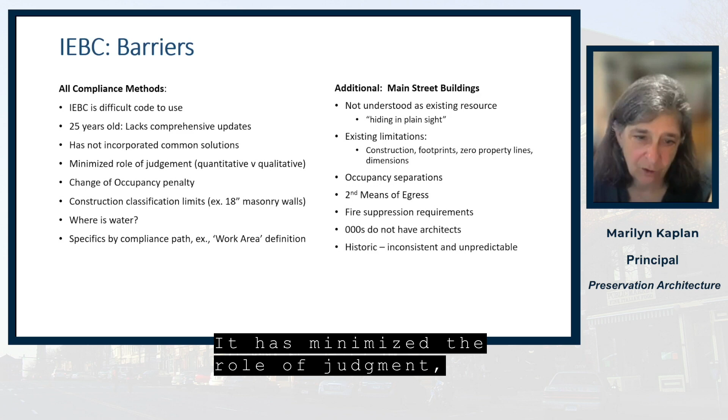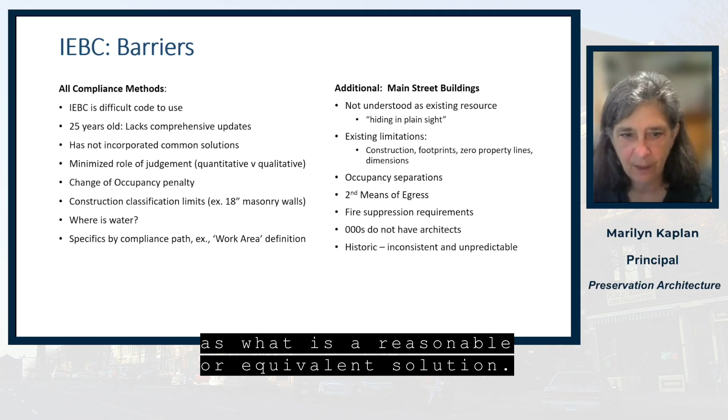It has minimized the role of judgment, favoring quantitative versus qualitative thinking on the part of the code official and the design professional as to what is a reasonable or equivalent solution. We still have that change of occupancy penalty. Construction classification limits can be narrow. Big issue, where is water? What happens if we don't have water, but fire suppression is required? And there are some very specific and narrow issues related to the lack of a definition of distinct fire hazard or work area definition, things like that.

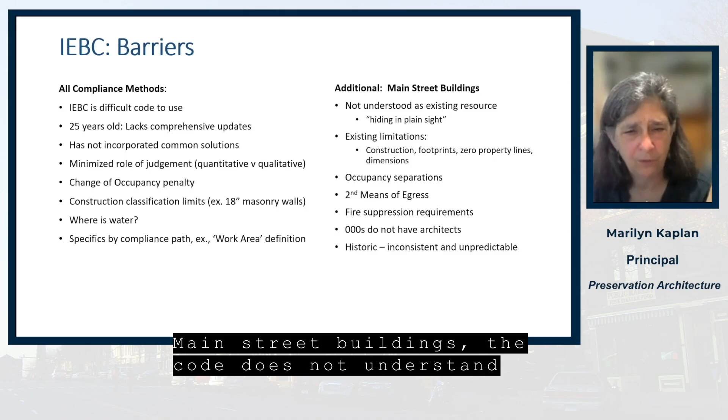For Main Street buildings, in addition, we have some other barriers. Main Street buildings, the code does not understand these to be very important existing resources. They are hiding in plain sight of the code. Existing limitations of Main Street buildings are not addressed or really understood or worked with, meaning what construction type are they? What's the footprint? We've got zero property lines. We've got existing dimensions that can't be modified.

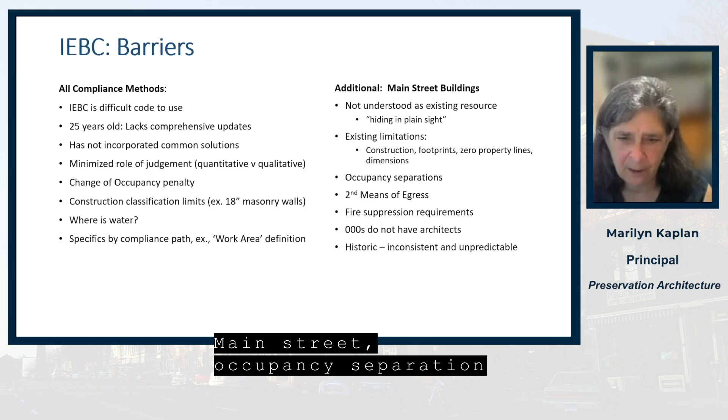Main Street occupancy separation between typically the first floor and upper floors can be very problematic. We may not have room to get a second means of egress. The fire suppression requirements can be substantial. In thousands and thousands of existing Main Street buildings around the country, architects are not working on the project. And so the ability to work through some of the alternatives that are permitted can be very difficult. And for historic Main Street buildings in particular, we can find the code to be inconsistent and unpredictable.

In closing, beyond using the codes to support the reuse of Main Street buildings, I want to mention the significant interactions with the property maintenance code, or whatever it might be called in your community, and code enforcement. While it's not the subject of our work over these 3 days, this does merit future discussions, because a poorly maintained building becomes eventually unrehabilitatable, and then we've got nothing.

These vacant and underutilized buildings are key to addressing housing issues and to strengthen communities across the country. And this is a recent graph from the New York Times talking about critical housing supply shortages, not just localized, although there's a lot of red in California and on the East Coast, but so many communities are not using their upper floors to the capacity that they can be used. And these are arguably the greatest opportunity we have, literally hiding there in plain sight.

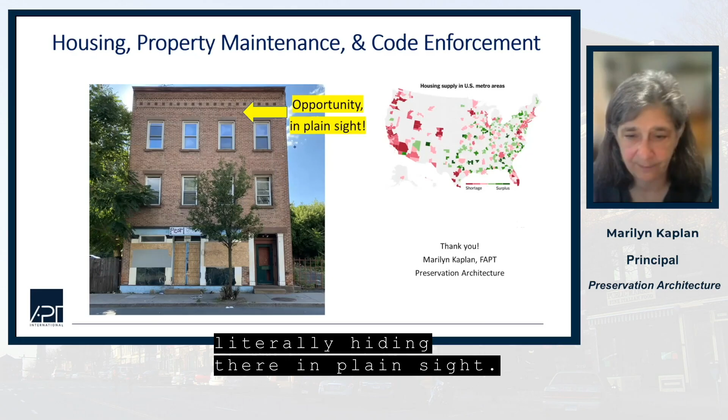Marilyn, I continue to be impressed by the broad knowledge you have of how the codes came to be, what we've got in there, how it developed from the model codes, etc. Any thoughts from you on what you're hearing from others about the historic building chapter, since that's kind of one of our specialty areas with APT? What's the general consensus of issues you hear about the historic buildings?

Oh, I'd say in general, beyond historic buildings, that the IEBC is complicated. It needs an update. It's largely unchanged since 25 years ago. And there's been quite a bit of support for the concept of re-envisioning how small buildings are treated. And back to your question, better alignment with historic preservation policy, both in language or the types of issues that the code can readily address without a lot of compliance alternatives or alternative approaches being sought. And certainly many in our audience have experience with historic buildings and alternate solutions.